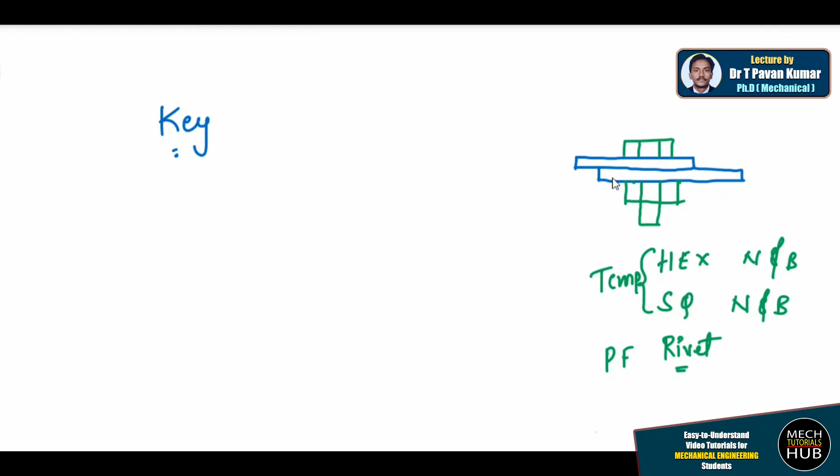Now the question is, in case of flat rectangular sheets or square sheets, you are going with this kind of arrangement, that is fine. But how about a shaft? When you have a cylindrical shaft of this kind, I would like to join these two. This is shaft number 1, and let us call this shaft number 2. These are two shafts which are having some dimensions.

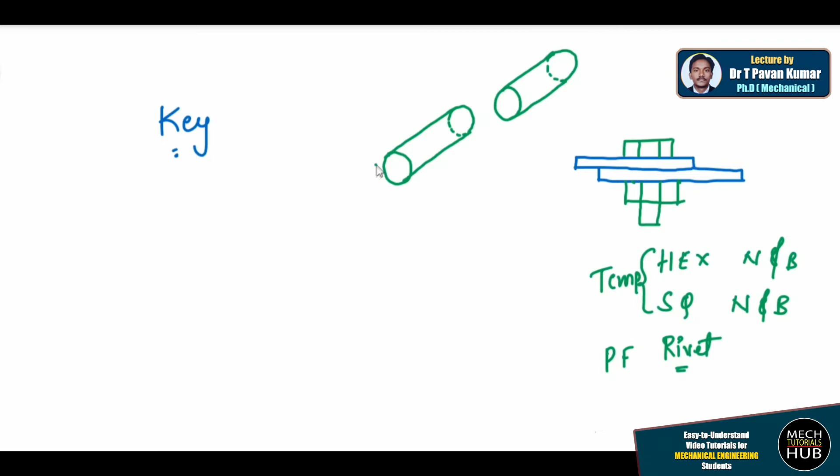Let us say this is maintaining a diameter of d1, this is also maintaining a diameter of d1, and having a length of 100 meters. This is also having a length of 100 meters. I would like to join these two. Why would you like to join is a question.

Now for example, if you know about a turbine, which is a prime mover, I am giving you the application point of it. So one end of the shaft is connected to a turbine and the other end is connected to a generator. So in between these two shafts, if I would like to make any coupling, if I would like to join these two shafts together, for example this is shaft number 1 and this is shaft number 2, if I want to join these two, what I try to do is mount a hub over it.

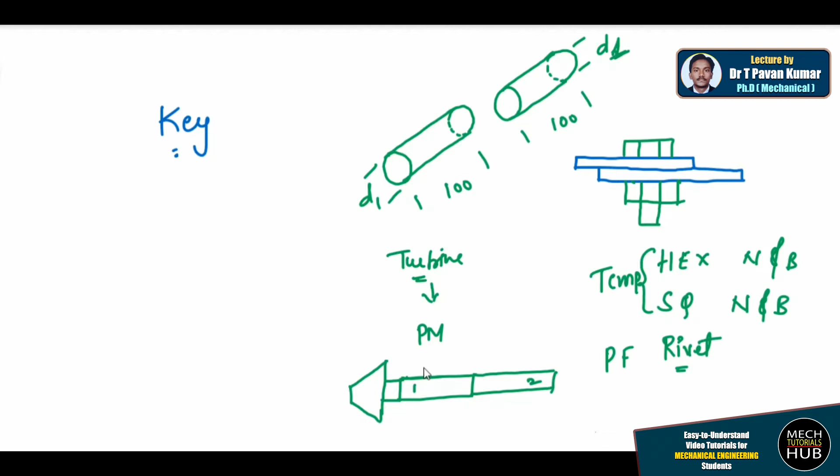From this side I'll try to mount a hub. For example, the hub's internal diameter should again match whatever the diameter of the shaft is, and the external diameter should be 2 times the internal diameter, and there should be a length maintained. What length should be maintained, we'll discuss all this.

This is the internal position of the hole. When I place this, I just call this a hub. When I place the hub over from one side to the other, the 2D representation of the hub is going to be something like this. Now I just try to place it from one side to the other, then I need to lock the hub and the shaft. That is the main idea.

Why would you lock it means here, this is going to rotate. When you apply some torque to it, it will rotate with some speed, maybe 2000 rpm, rotations per minute. When this particular shaft rotates with 2000 rpm, there might be some misalignments. It is not compulsory that the shaft and the hub should rotate with the same speed. There might be some mismatch between the speeds unless you fix these two.

Now to fix these two shafts, it is not possible with the help of a hexagonal nut bolt, square nut bolt, or a rivet, or welding. It is not at all possible with welding also, because it is going to exhibit a speed of 2000 rpm or 4000 rpm, which is very high speed comparatively.

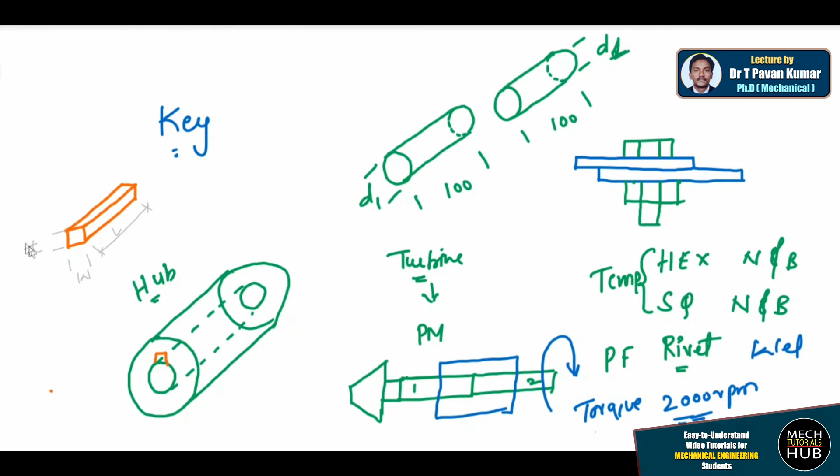So conventionally consider this as a key. Now I make use of this key. What I try here is, I just try to drill a hole in the hub area - I drill a slot in the hub area. Now the size of this particular slot should maintain a size of W by T.

Because this is the key I am going to manufacture for my application point, based on the width and thickness of the key, I'll try to drill a hole over here, and it should maintain a length. Let us say that particular length.

Now when I place this hub from one side to the other, in the front view, that particular keyway may look something like this - hidden, because it is completely invisible from the front view. I was just showing you with a hidden line. This is how it looks.

Now likewise, throughout the circumference, I'll try to place 2 or 3 keyways. This slot we call a keyway. We call this slot a keyway.

Try to understand - now how many elements do we have? Shaft number 1 is one element, shaft number 2 is another element, and a hub is called the third element. Other than the third element, there is a keyway. Now in this keyway, we are going to place a key - that key we call the fourth element.

The idea here is not to weld, not to rivet, not to use a square nut bolt, not to use a hexagonal nut bolt, but only with the help of a key arrangement can you lock the hub and the shaft. Now these two shafts are under a butt arrangement, number 1 point.

Number 2, the hub is placed over it symmetrically from the midpoint, from the butt joint on either side - it is equally distributed, the hub portion is equally placed. After that I am placing a keyway inside. When you place a key in between the shaft and the hub, this key is going to lock both the elements. Try to understand - this key is going to lock both the elements.

Now if I show you the front view of this particular arrangement, let us consider a front view. This blue color one is a hub. I'll just try to draw this hub with a blue color. This is the hub from the front.

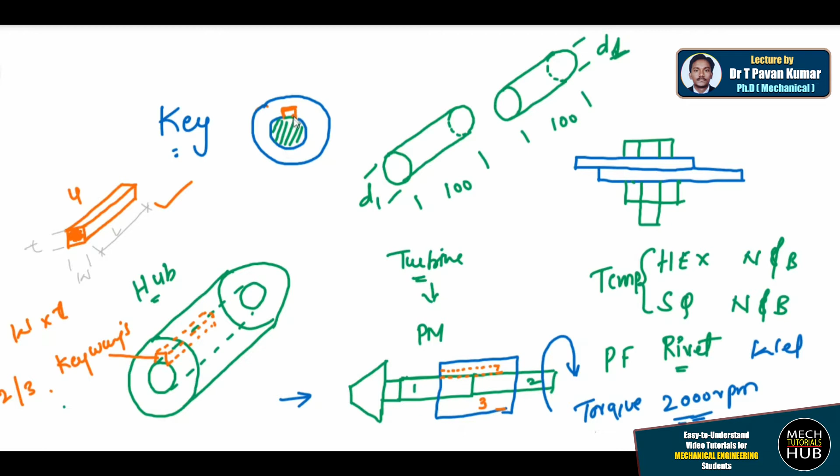Now I am going to take this particular key and insert it from here. When I insert from here, it will go in with some tightness - I just knock it with the help of a hammer or some other arrangement. From the side, this is how the arrangement is going to be. This key is going to catch hold of the hub and the shaft. This is how a key will work.

Like in general, you lock your room with the help of a lock and key arrangement. In a similar fashion, to lock this hub and shaft, we'll try to use a keyway. Now these keyways are different types, and these key shapes are also different types - that discussion we'll have. I think I'm very clear now. Try to understand - the only idea to use a key is to clamp both the shaft and the hub.

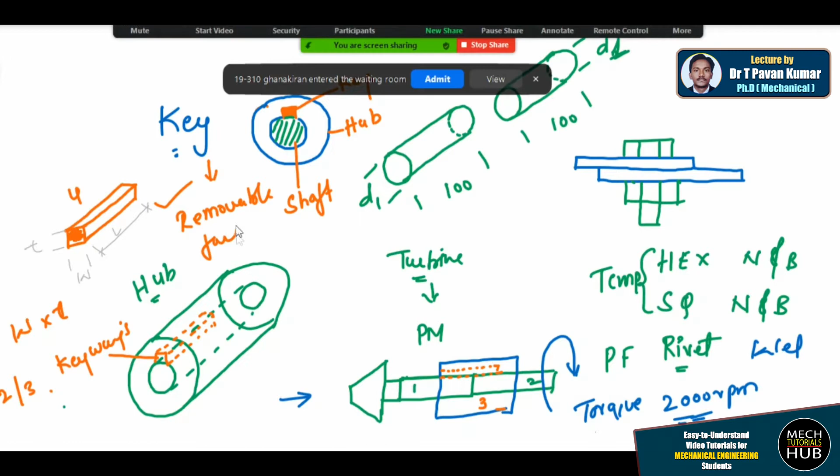Now this key acts as a removable fastener. You can call this key a removable fastener. Now this is also a fastener, but you can remove it whenever you want.

That is possible, whereas in case of a riveted joint, this is not at all possible. If you try to remove it, what happens? The complete sheet will get spoiled - that is what we have discussed now. So this is a permanent joint. Now key is also a temporary joint.

When and where required, you can remove it. Assembly and removal of these joints are easy as they are simple in shape. Now the shape of the key is very simple - only thing is, there are a few changes you find from one key to the other.

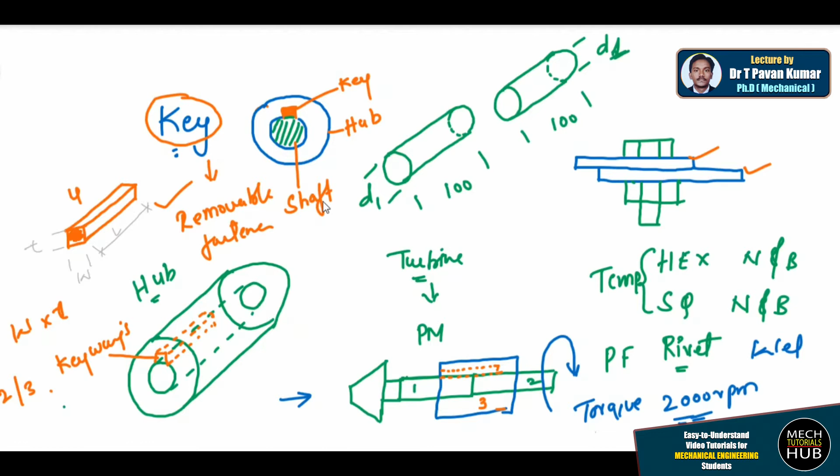Remember this is also a temporary fastener - whenever you want, you can remove it. Based on different types of keys, those keys are used under different loading conditions. That discussion we'll have now. If you have any queries till now, you can ask me.

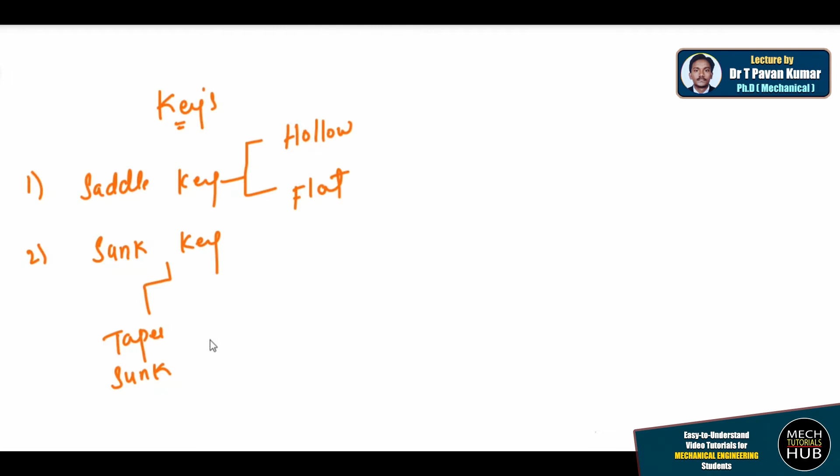Other than this, you have parallel or feather keys, which also comes under sunk keys only. Okay, parallel keys or feather keys. We'll try to finish off this discussion today.

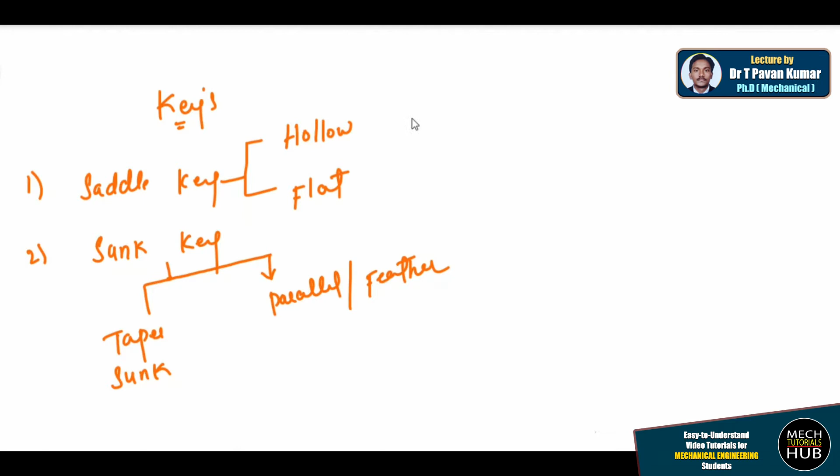Now coming to this particular saddle key, let me give you a briefing of what exactly saddle keys are. This saddle, which I have drawn a simple sketch before, let us call this a simple representation, a 3D representation of a key for your understanding.

Out of this, let me call this the width, and this is thickness. The overall is the length. Try to understand, the overall is the length.

Now coming to the saddle keys, there will be a taper section on the top surface, with uniform width throughout. If you try to calculate the width at any cross section at any point of the length, then the width will be same.

But when it comes to the thickness, the thickness will come down from one side to the other. For example, here the thickness maintained is 10 mm. Thickness of the key maintained is 10 mm.

If you go throughout the length, at the end there might be a thickness of 9 mm, or else there might be a thickness of 8.5 mm. This means there is a taper section of 1:100.

What is the meaning of taper section 1:100? Try to understand, at every 10 mm length, there is a reduction of 1 mm. That is the meaning of 1:100.

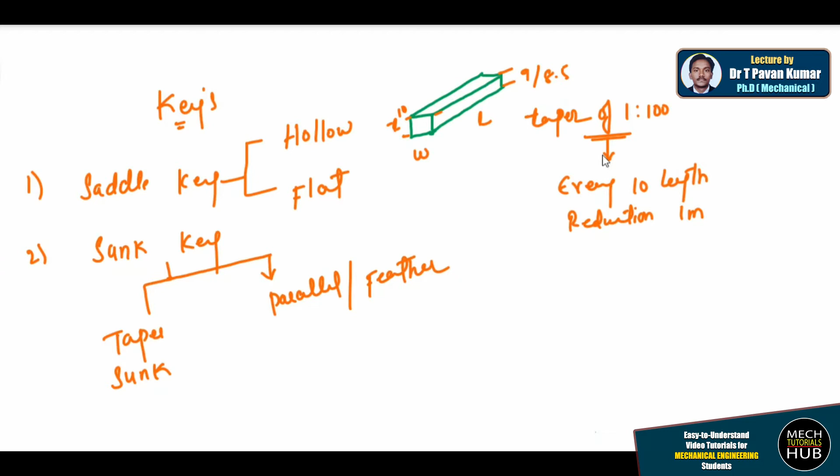For a length of 100 mm, we are going to reduce by 10 mm. That is the logic. That is nothing but a taper section.

For example, if the length of the key is 100 mm, then the taper section is going to be 10 mm. Whatever thickness you are using, the thickness is going to drop down over a length of 10 mm. If it is maintaining 50 mm, when you come to the end of the key, it is going to maintain a thickness of 40 mm. That is the meaning.

If here it is maintaining 30 mm, at the end you could see it as 20 mm. If the overall length is 100, only then this is applicable. From the taper section of 1:100, the symbol of taper section will always be something like this.

Initially there is an actual thickness maintained, but as you go throughout the length, it is going to drop down. This is the meaning of 1:100 - throughout a length of 100 mm, there should be a reduction of 1 mm for every 10 mm.

That is the meaning of this particular 1:100 ratio. But when it comes to our actual sketches, what you draw on sheet, we don't maintain any 100 mm actually. The length will be hardly 25 mm or 30 mm you will get. Okay, those standards I'll show you. So in such a scenario, what exactly do we need to do?

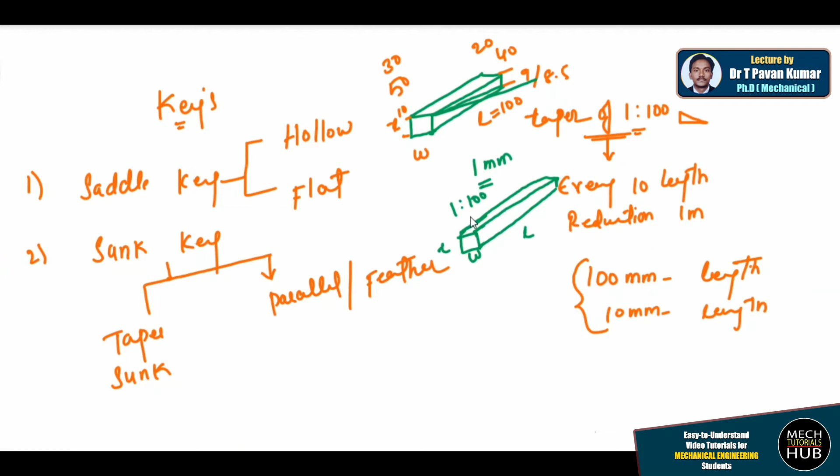Okay, and these saddle keys are again made of two types: one is hollow, one is flat. What is hollow, what is flat, we'll see now.

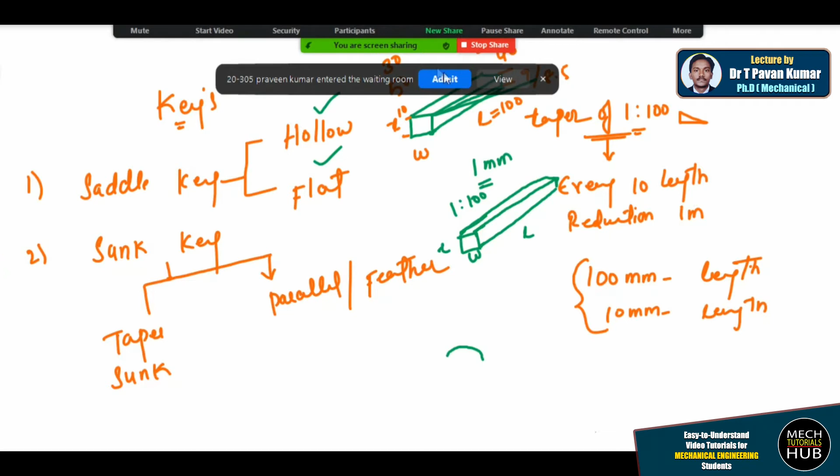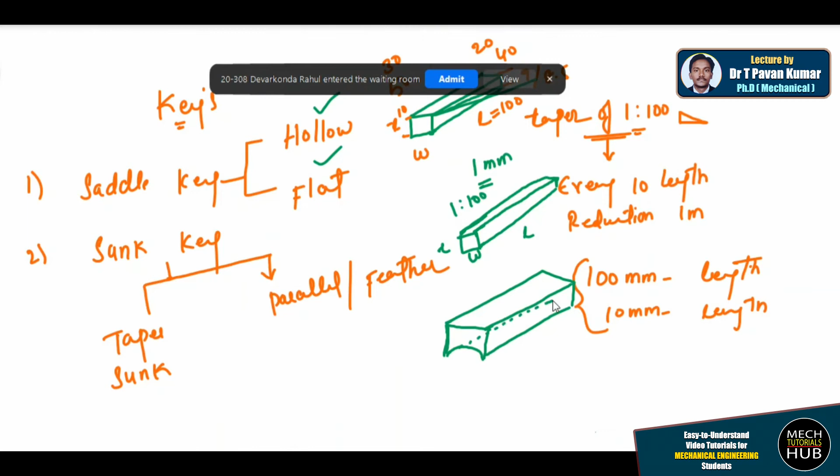Hollow, nothing but the hollow key is represented something like this. The bottom flat surface is going to be in concave shape. This bottom is going to be concave, and the height, thickness will remain same. The length, whatever we have calculated, we need to follow. Throughout the length you have a concave shape arrangement, something like this in three-dimensional representation, throughout the length you have a concave shape profile.

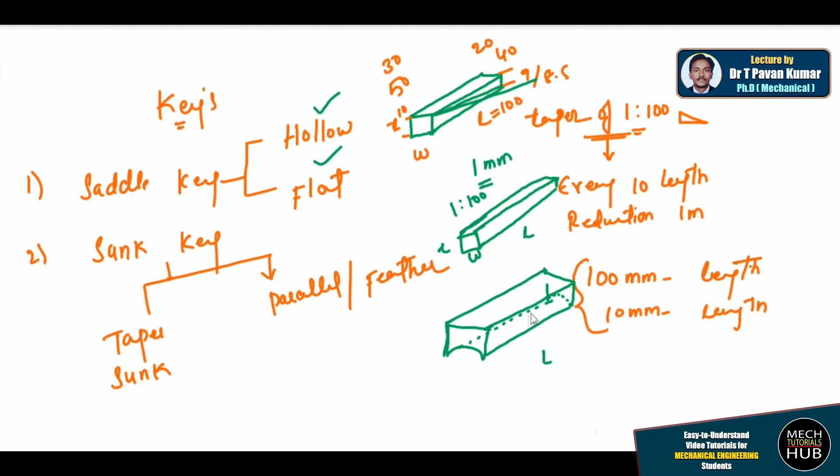Now how this particular arrangement is going to be, that discussion we have. A hollow saddle key has a concave shape bottom to suit the curved surface of the shaft. This concave shape is going to sit on the shaft properly. The concave shape depends on the diameter of the shaft which you are supposed to use.

So how this arrangement is going to be, let us have a small discussion on it. Coming to the hollow, let us consider this as the hub portion, and this as the internal diameter of hub portion. If this is the case, we need to have a keyway. Let me erase this portion and draw the keyway. Let us consider this as the keyway. Till here it is fine.

Now I am taking this particular key and inserting it from the front. Then what happens? What I could see is only this profile, this shape. So that shape is going to sit here inside this, and the profile, the concave shape, will take the shape of the shaft, something like this. Means three-dimensional, I'll try to show you the representation.

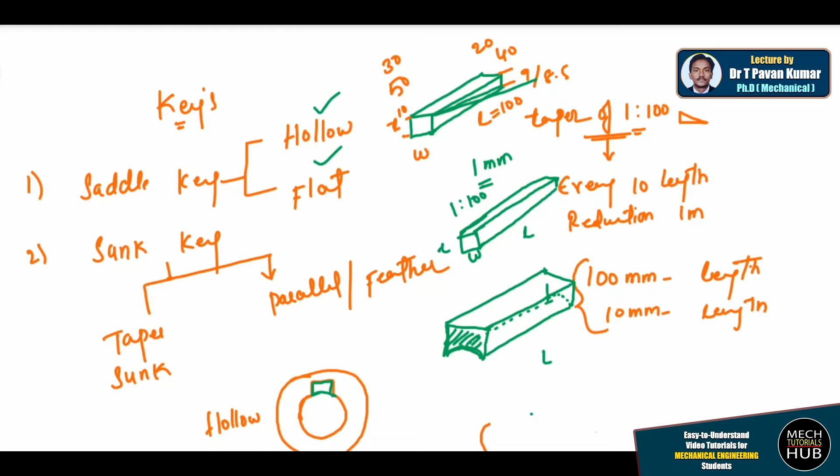We'll see the 3D representation. This is the internal diameter of the circle. This is the external diameter of the hub portion.

Then let us consider this as the length of the hub portion, something like this, and there will be a through hole from one side to the other. So let me take this through hole as an invisible hole, and there is a through hole indication. This is fine, but here you find you have a keyway.

So that keyway I am going to represent now. This key is going to take the shape of the shaft followed by the height, something like this. It is going to be fixed something like this.

So everything will be hidden. So I'll just try to make it hidden. I just try to make things hidden.

Sir, you can use a different color. Very clear, okay ma. Is this clear now? Green color, because I have drawn or represented this key as green color, no? That is the reason I am taking green color here. This is how it is going to fix, ma. The main idea here is, better what I try is, I'll take some other color, as you said, for the shaft portion, something like this.

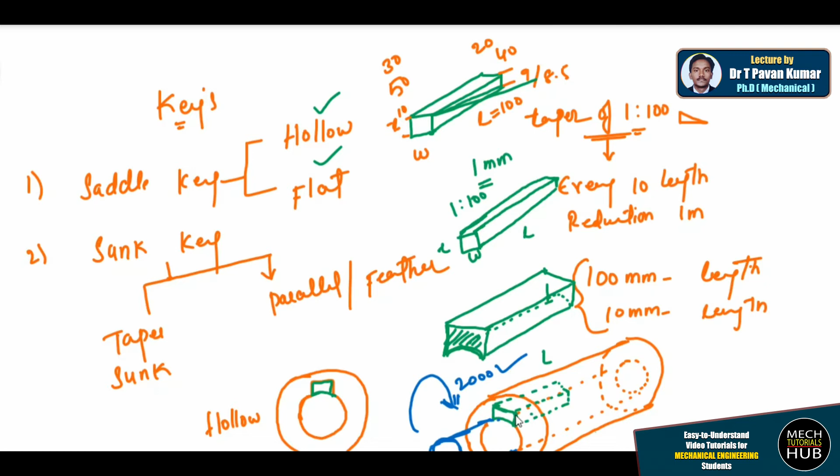Let us say this particular shaft is continued till the other side. Then you will get an idea of how the arrangement is going to be. Now the idea is to lock these two arrangements. This is how it is going to be.

This is in case of a hollow key. But whereas in case of a flat key, the complete key is flat. There won't be any concave shape to the bottom, only a flat surface. A complete flat key, something like this, will have a flat surface, a width, a thickness, followed by a length.

Coming to the top surface, here it is completely tapered. There will be a taper section. For example, if the thickness of the key is 10 mm, then as it moves throughout the length from one side to the other, the thickness is supposed to be 9 mm. We need to reduce by 1 mm for every 100 mm. But that logic can't apply here because the overall length is not very high — around 25-30 mm when it comes to specifications. There are some standard specifications also.

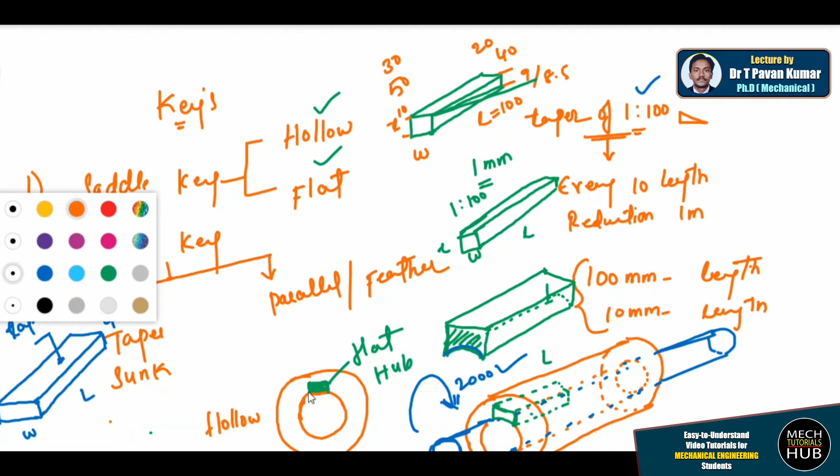This is about a hollow key, where the hollow key will completely insert inside the hub portion — the key takes the portion of the hub, but not the shaft portion. Whereas in case of a hollow key, you see the same kind of arrangement, where the complete hollow key takes a portion of the hub, 100%. Whereas in case of a flat key, only some 1 mm or 0.5, 0.2 mm portion of the shaft is taken by the flat key, because we are making it a straight surface.

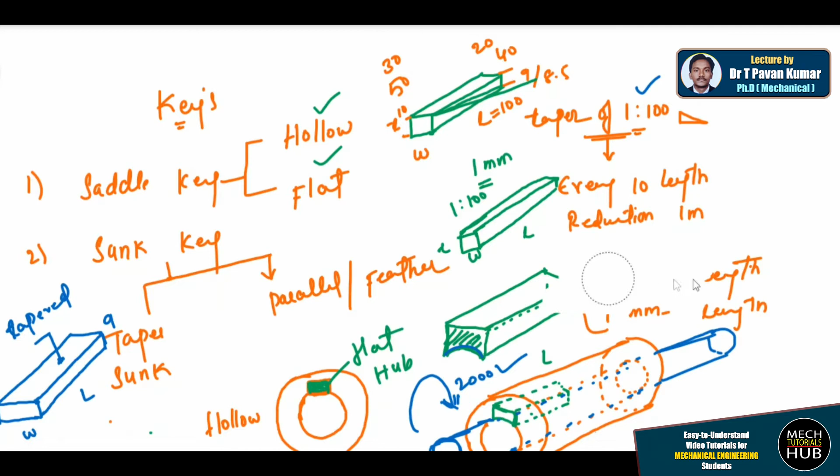Same thing I would like to present here. Wait a minute, let me erase some points. Again I'll just try to represent it three-dimensionally. Let us consider this as the shaft, and this is the length of the shaft — complete length of the shaft.

Let me join something like this. Till here it is okay. Now I would like to place a keyway directly just to make you understand. Based on the length of the key, I'll try to file this portion, the area where exactly the key is going to be positioned. So this area I'll just try to make it flat, not circumferential, just flat.

Then what I do is I'll go with the hub portion. Let us consider this as the hub portion, external one, this is the internal one, and there is a keyway. This is the length of the hub, and the keyway is still some distance away. What distance, we'll see that. There will be a hub portion, this is how it is going to be.

Now this is how the arrangement of a hollow key or a flat key is going to be in case of a simple shaft and hub arrangement, where these keyways are used in case of low duty applications, not very high duty applications. For example, in case of pulley arrangements, gear arrangements, or wheel arrangements, couplings, this particular keyway is used. That is how the arrangement is going to be.

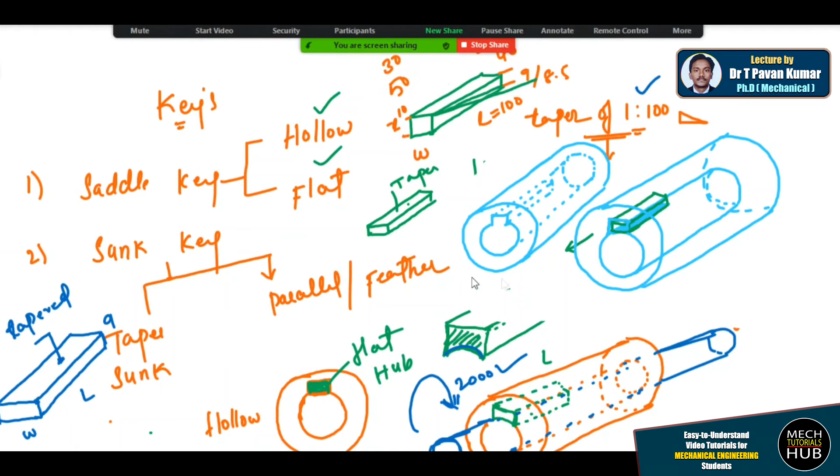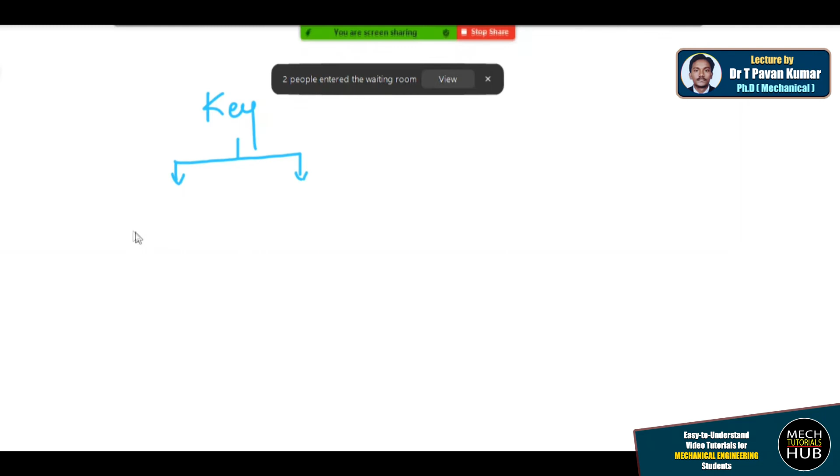Let me draw the representation. What exactly you people need to do in case of an examination, let us see. Coming to your examination point, you need to draw the representation, whether it is a hollow or a flat key. No need to draw any 3D views of the component or the key.

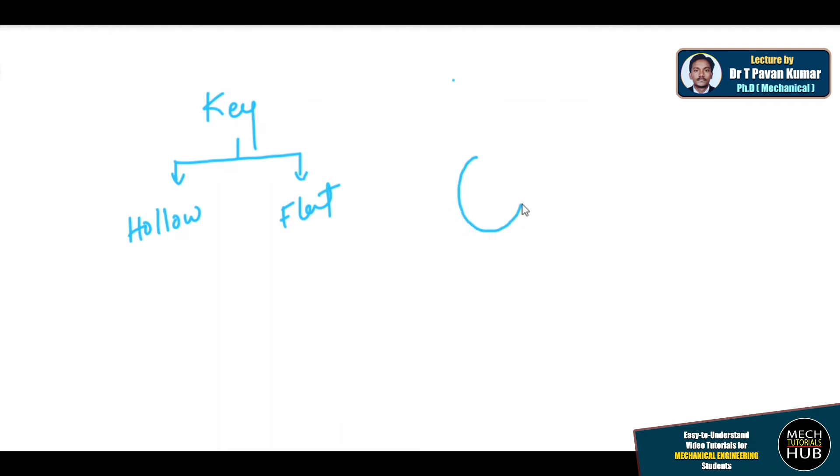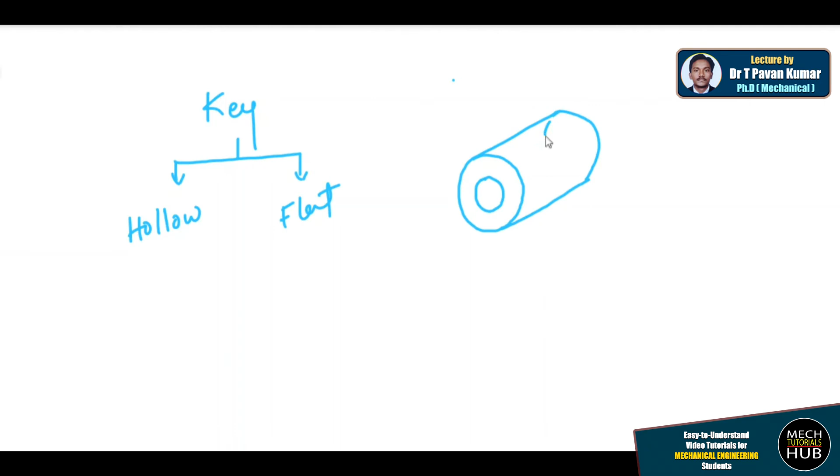All right, let us consider this as the hub portion, where the shaft is going to insert. This is the hub, this is how I could show you. And if it is where we need to insert a key also, so that will simply take this position. Okay, here is the keyway.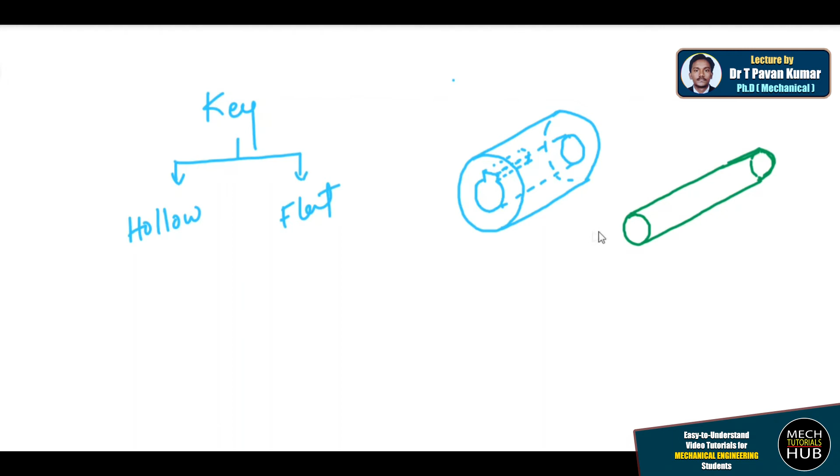It will maintain a certain distance; those distance details will go. And there is a shaft, I'll change the color of the shaft. There is a shaft having a diameter equal to whatever diameter is maintained by the hub, and an overall length of some 100 mm or 50 mm. We are not bothered about the specifications now. My idea is I would like to insert a shaft inside the hub; this we call it as a hub.

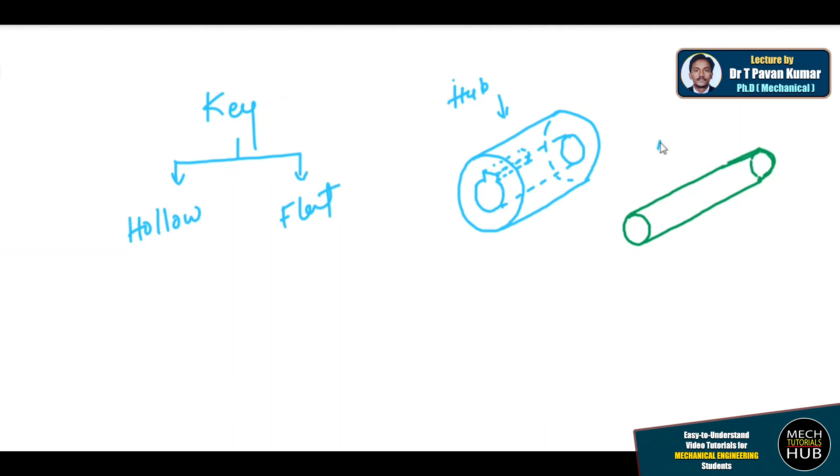This is a hub and this is a shaft, a circular or cylindrical element. Now both are maintaining a diameter of d1. This shaft is also maintaining a diameter of d1. The outer diameter here you call d2. Till here it is fine.

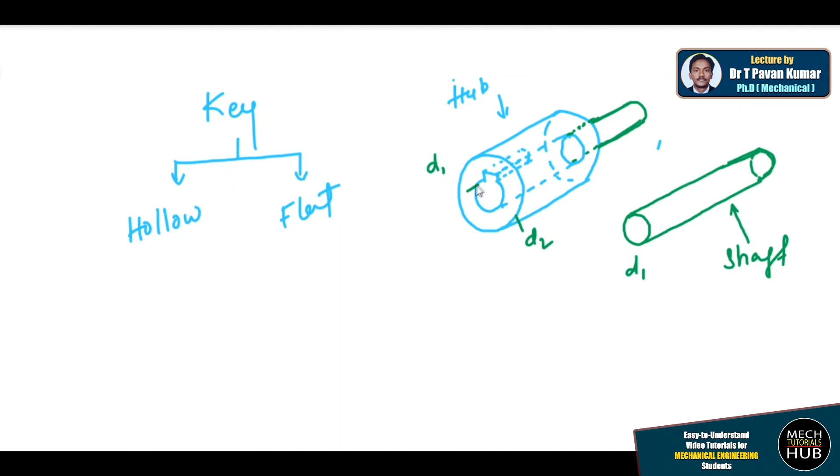Now my idea is to arrange this shaft inside this. When I insert it, what happens? Some portion will completely go inside and the rest will come out, something like this. The portion coming out is completely visible to us, and the portion on the front side is also visible.

This is how the arrangement is going to be. Now these two should lock, so I'll take some other color for your understanding. Let us consider this as the key, which is maintaining W and T. What is W, what is T, we'll discuss now. As of now I'm representing everything conventionally. This is element number 1, this is element number 2, this is element number 3.

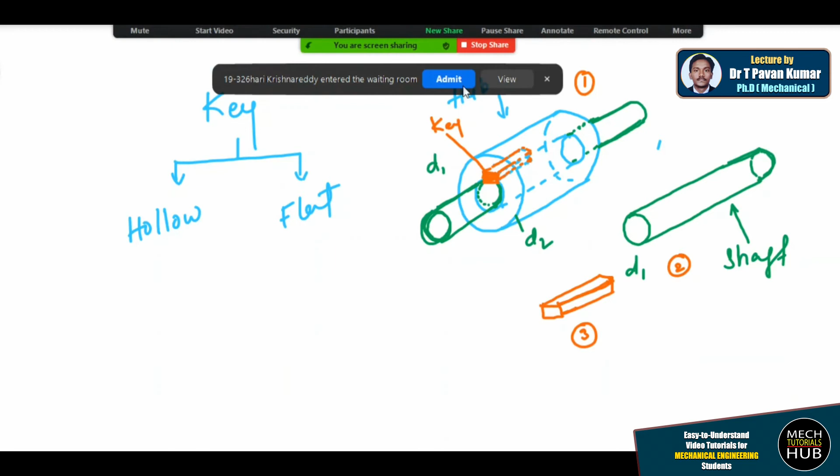I'm making use of all three just to prevent relative movement between component 1 and 2. So for that I'll take this key and place it here, whether it could be a flat key or a round hollow key. This is going to insert up to some length, something like this, so that this key will help to lock the hub and the shaft.

If it is a hollow key, you have a concave shape at the bottom, something like this. If it is flat, you have a bottom flat surface. But in both cases you have a taper section. Try to remember, in both cases the top surface is tapered. Unless it is tapered, you can't insert it inside.

For example, if you want to insert a nail inside the wall, what you try to do initially nowadays is drill a hole. After that you place a wooden piece inside it. That wooden piece is going to be of this shape, if you could remember, wooden pieces of this kind, because the dimensions W and T maintained here in the front will not be maintained in the back, since it is somewhat tapered in cross section.

Try to understand, width will remain the same but thickness will vary. That is what it means. This is how this will work. Coming to the application point, these keys are used in case of pulleys, gears, wheels, and coupling arrangements. This is about a hollow key and a flat key. We'll go into details of the standards within a minute or two.

That detail we'll see. Now after this, saddle key - these two are nothing but saddle keys. This is also saddle. This is how the arrangement is going to be, but the logic remains the same, the arrangement almost remains the same, but the key shape and size will vary. That is the only difference.

Now in the examination also they ask you to draw the representation of saddle keys conventionally. So here you need to consider your own dimensions - diameter of the shaft, internal and external diameter of the hub, and width by thickness by length of the key also conventionally. And show the taper section there too, that is also important.

But in your examination, there's no need to draw this 3D representation. Only thing is, if this is the arrangement, you need to show the arrangement, that's it. For example, if I view this particular component from the front and from the side, how exactly it is going to look, that representation we need to show. I'll show you one and move on to the next topic.

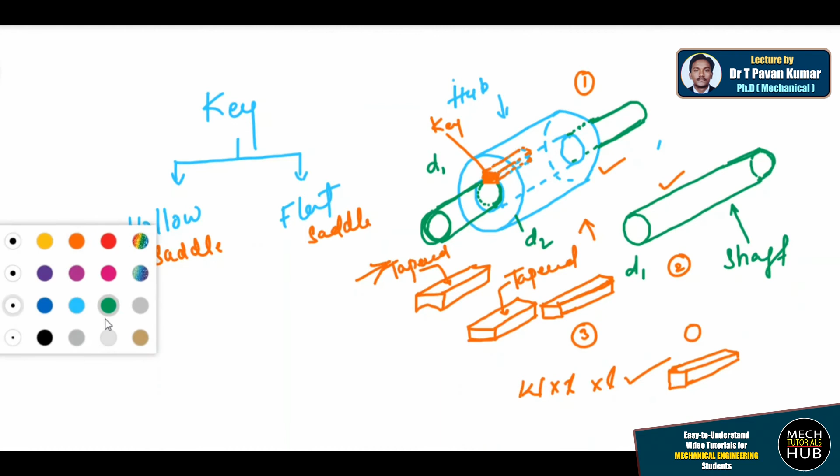Let me draw this, taking the same color so you'll understand. This is the outer circle or outer diameter of the hub. This is the internal diameter of the hub. Now let us imagine that the shaft is already inserted. This is the portion where the shaft got inserted, meaning we are showing the cut section so the other person will understand. And to show the keyway, it will remain like a box only, something like this.

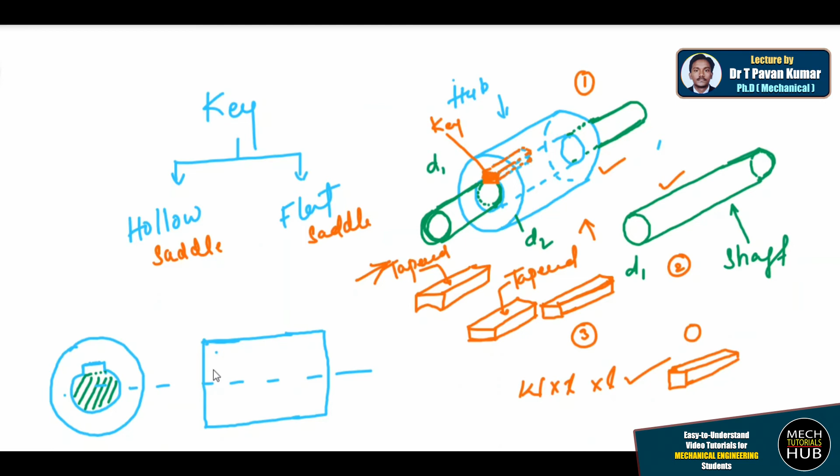And side view, we need to represent the side view also. From the side, if you look at the component, it will maintain some length - the hub is maintaining some length, followed by, here it is closing somewhere, here it is closing. This is the axis line. Then there will be a shaft portion. Here, I just try to place this shaft somewhere here. There is a shaft inserted which is coming out. If it is coming out, it is visible completely.

Okay, this side also I'll try to make things visible for your understanding. This is fine, but to lock these two, we'll try with a keyway. I'll go with a color. Now this is the keyway in between two components. This is how it is going to be. This is the front view of the arrangement, this is the side view of the arrangement. And here is your key.

If it is a hollow key, you have a circumference, something curvily concave shape. If it is a flat key, you have a straight surface. That is the only difference, simple difference. This is how it is going to be.

Now let us discuss about sunk keys. Let me close this.

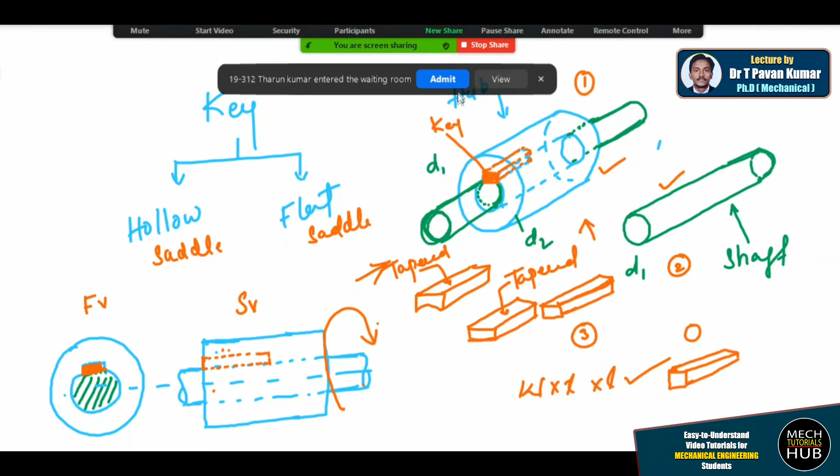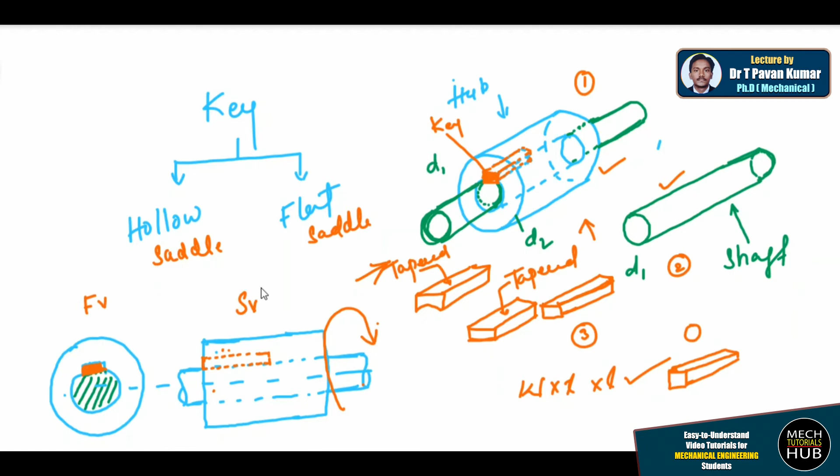Okay, I got it. Coupling, do you know the arrangement of a coupling? I'll just draw that sketch so that you'll understand.

For example, the coupling is going to be something like this. Let us say this has one coupling where there is a hole from one side to the other, one flange, you can say. This is the other flange. Okay, this is flange 1, this is flange number 2.

There I have explained the concept of a key, just a concept of a key, but as you having doubt, let me take this as shaft number 1. This is shaft number 1, this is shaft number 2, 1 and 2.

Now the idea is, when I rotate, I would like to transmit power or the torque from one shaft to the other, the torque or the power, speed or the power. Then what I do, I'll insert this particular shaft from one side.

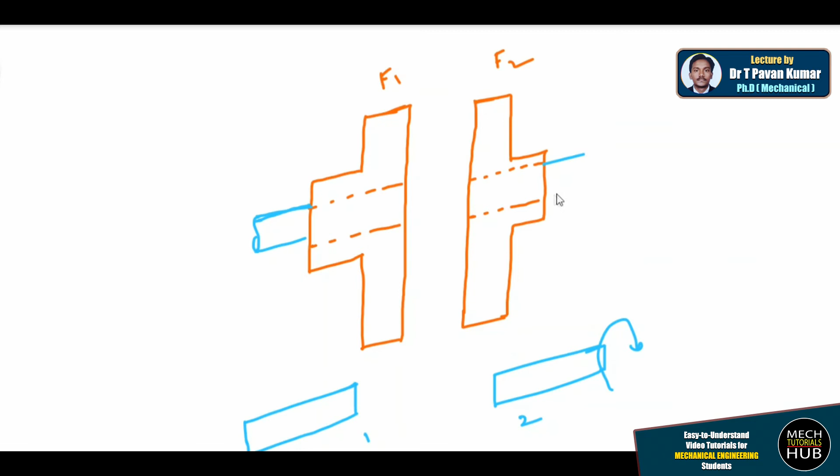This is a shaft, and this shaft from another side. Okay, then both will come and join somewhere here in the name of butt. I'll just join them both, something like this.

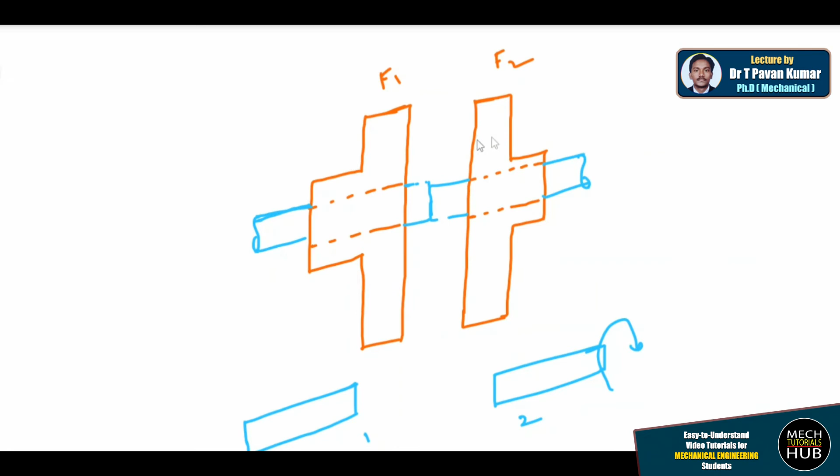Now what I do, I'll try to bring these two couplings closer so that you'll understand. The idea is not just to clamp, the idea is to transmit torque or the power also.

Okay, let us consider this as one more flange of the coupling. This is the shaft portion. Let me change the color. This is the shaft portion, this is the inserted one. Okay, both got butted somewhere here.

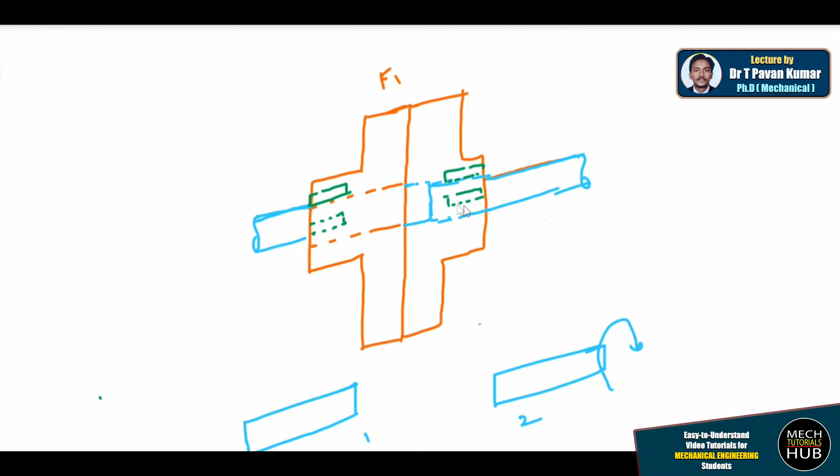Now to lock these two, what I can do is use a keyway. I can simply make use of a keyway somewhere here. Try to understand, here is one and here is another. At some 90 degrees you find one more key, or else 60 degrees one more, something like that. Throughout the circumference you will try to place 2 or 3 keys.

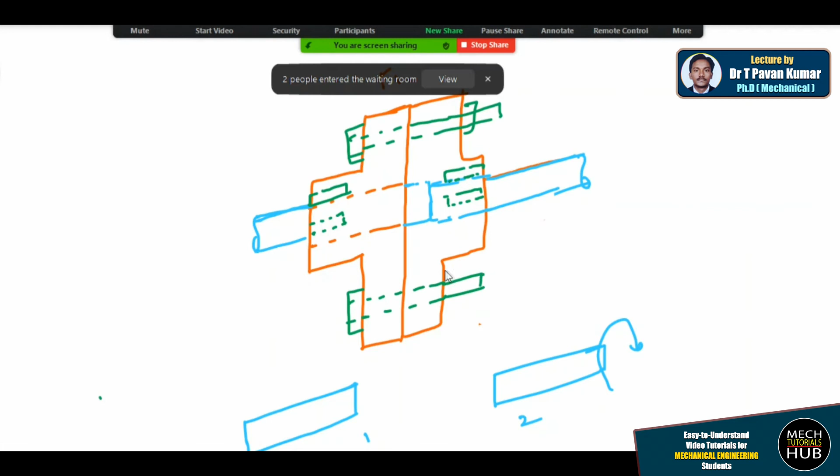Now this key will help the shaft to be in alignment and clamp with the coupling. And to clamp these two couplings, what I do is go with a hexagonal nut and bolt arrangement, something like this. This is the application point. This is how it is going to be, and this is the bolt portion, this is the nut portion. Wait a minute, somebody is entering.

The idea is, I would like to transmit the torque from one shaft to the other. That I can't do with the help of welding or riveting or nut bolt arrangement alone. So what I'm trying to do, as these two shafts are circular in cross section, and I'm using a coupling arrangement which is made of 2 flanges, or you can say hubs. There are 2 hubs or one single hub. What I'm trying to do is place one shaft from one side and one second shaft from the other side, placing it in butt position, to arrest the relative motion between hub and the shaft, making use of a key. Is this clear now?

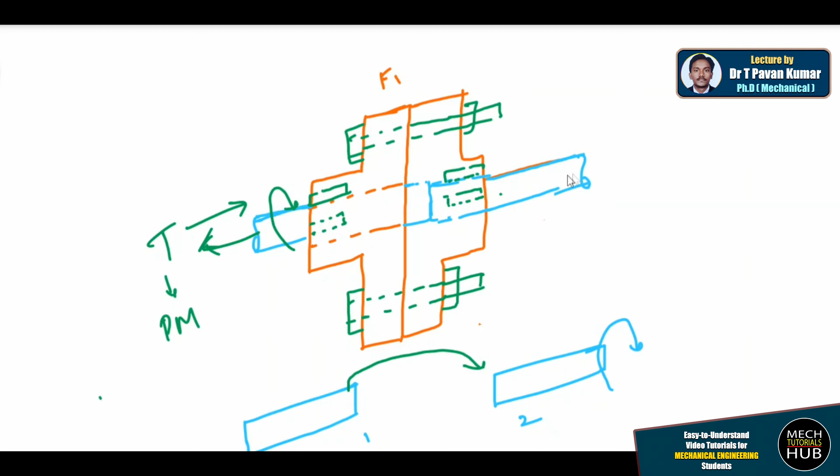This end may be connected to a turbine, where the turbine acts as a prime mover. It will give some torque to the shaft, and the shaft starts rotating with the same speed. The other shaft, which is connected to a generator, should also rotate with the same rpm. Maybe this is rotating at 2000, this should also rotate at 2000 rpm.

Simply, if I make use of a hub over it, it won't be so effective. To lock these two shafts, I am using a hub and a key. To connect these two shafts, or to transmit power or torque from one shaft to the other, my idea is to make use of a hub and a key. As we are dealing with circular components, not flat components, try to understand this.

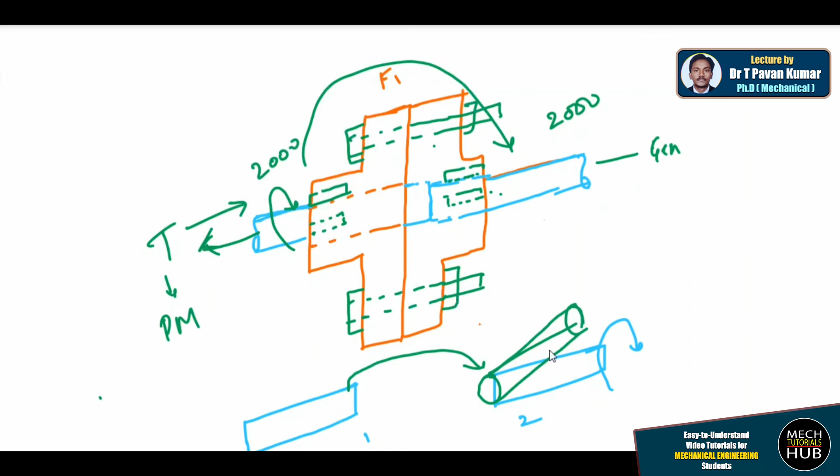This is how it is going to be. That is the main idea. Alright, so now let us talk about...

Sunk keys - the idea is the same, but in some cases hollow key will not work, flat key will not work, because it can only take a very small amount of loading conditions. You can't go up to very high levels of RPM in such a scenario. Now, what should be the dimensions of a key - length, thickness and width - these decisions we will make when we deal with the subject called design of machine members.

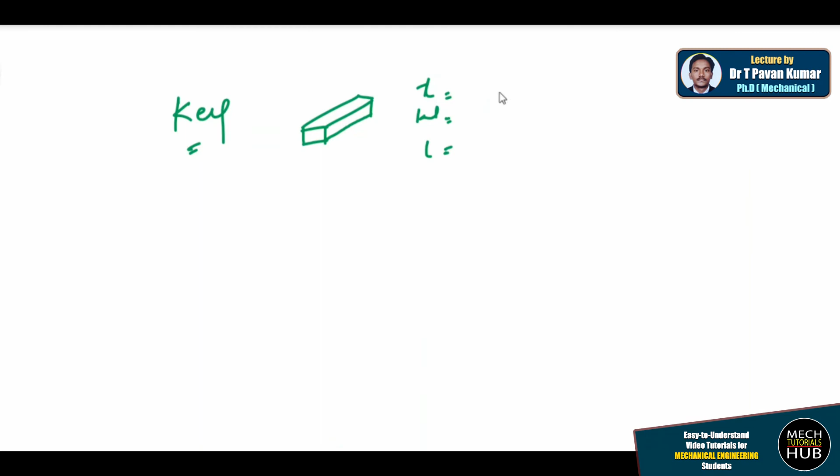By using permutations and combinations, we'll try to go with it. For example, if this is the key, what should be the length, width and thickness? T, W and L are decided based on the calculations. What calculations will we do? We'll do some strength calculations, and based on these strength calculations, we fix the dimensions, one proportion to the other.

If the thickness is 10 mm, W should be this much, length should be this much. All these proportions you find in the soft copy which I have sent you - there are different proportions given. If the thickness is 12 mm, then what should be W? That is already fixed. What should be the length? That is also fixed. These are all the simple calculations for this, which I'll also discuss now in case of sunk keys.

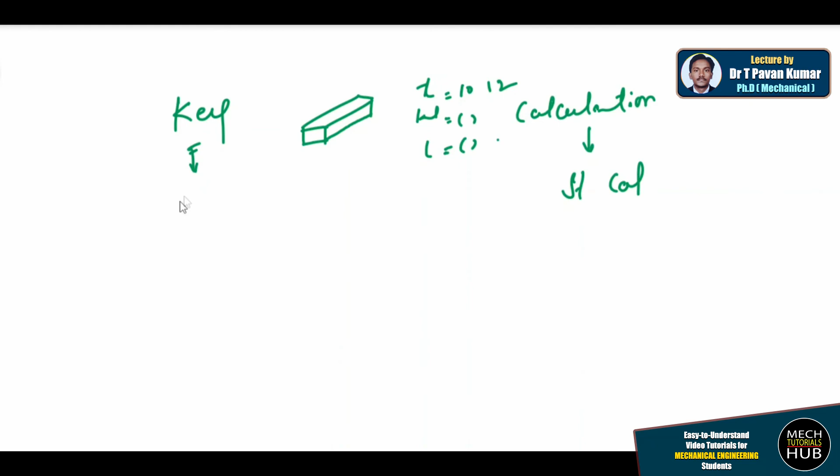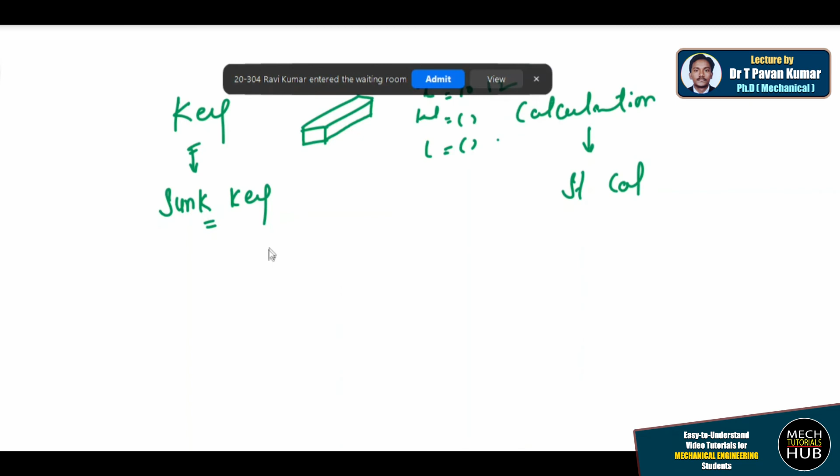Coming to this sunk key, it is also one type of key used to prevent relative motion between two elements - the hub and the shaft. Now coming to this particular sunk key, the only difference you see here is that taper is common. You have taper sunk key, and different types of feather keys. These sunk keys are classified...

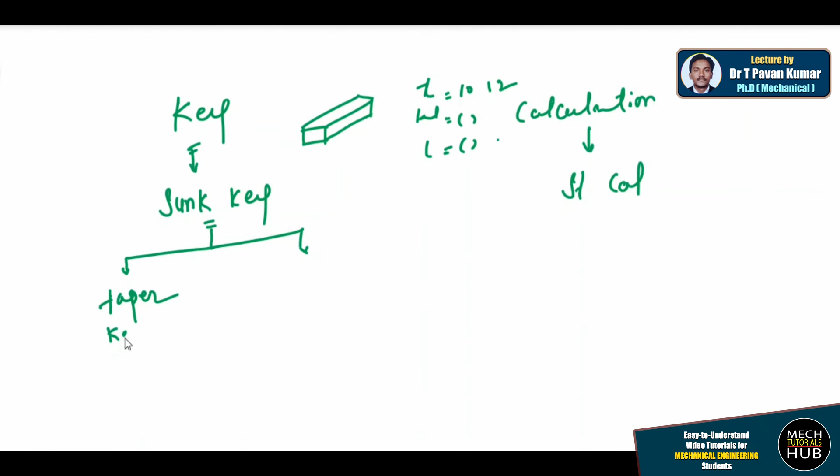Into types. Number 1 is taper key. Number 2, parallel keys. Number 3, Woodruff key. This is broadly classified into 3 types. Now these sunk keys are used in heavy duty applications.

Heavy duty application - it all depends on the conditions where exactly you are going to use the type of key. Comparatively, if you compare with hollow or flat key, sunk keys are stronger and can withstand higher loads. That is why I said these are used in heavy duty, as a fit between the shaft and the hub. So again the same concept or logic will apply, but only the shapes will change. The shape of the key is completely different. I'll just try to draw the shape of the key.

Just try to understand - the shape will be: some length will remain, and there will be a height. There will be a height and a thickness. We call this the thickness, and this is the height, and there is a drop down here, something like this, followed by a width. This is vertical, slant, horizontal - then this is a 3D representation of a key.

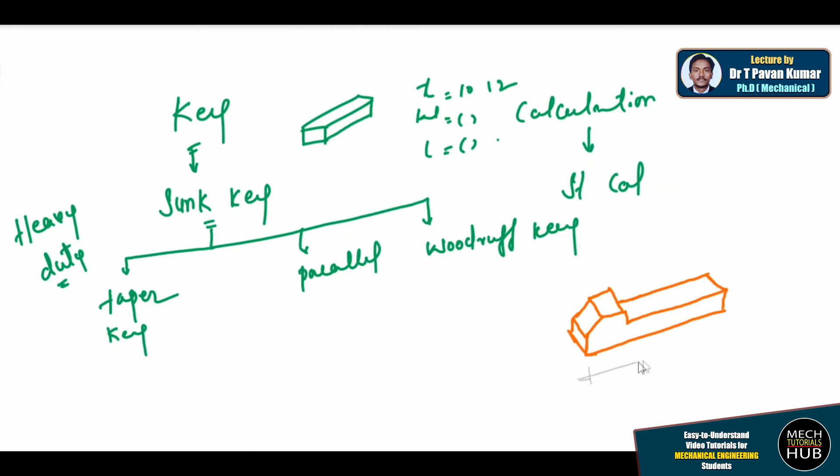Now out of this 3D representation, this is called the length of the key, and from top to bottom we call this the height of the key, and this small one as the thickness of the key. You have one more called B - this is represented with B. From here to this line, this is represented with a capital B. Capital B here is nothing but the width of head. This is called width of head, capital B. Coming to H, it is nothing but the height of head.

This is the height of head, and standard taper will maintain. Standard taper is nothing but the taper shape, which is 1:100. This is also fine. Other than this, this is called the width of the key.

Now the name of this particular key is nothing but key with gib head. What you call is, this is also a key with gib head.

Now this is called the head, gib head, which will exactly lock both the shaft and the hub portion. This particular head will help to prevent the rotary motion between the shaft and the hub. This actually we'll understand better when you visit any institute or organization where they use this particular kind of arrangement. In general discussion you might get many doubts in mind.

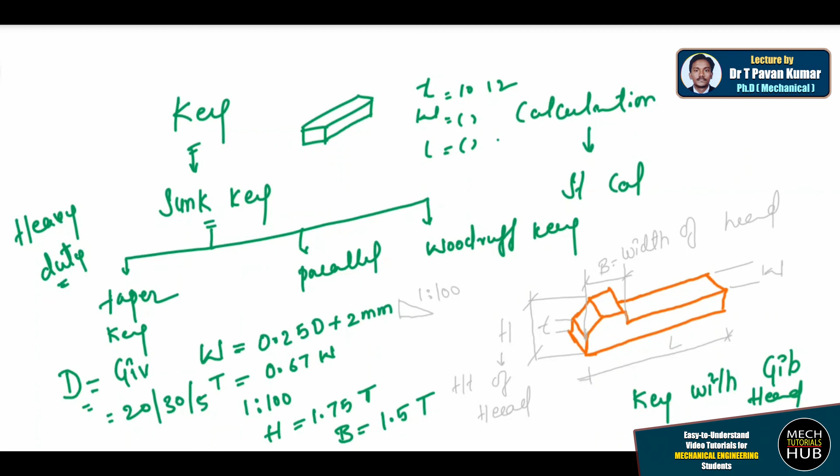In case of key with gib head, you need to remember all these dimensions. But one more important point to be noted here is, I'll draw the representation of taper sunk key.

Now, as we have seen in case of hollow and flat key, the arrangement is simple. But in case of these two, the arrangement or representation is something like this. You have the hub, the outer portion or outer circumference of the hub, and the internal part, as the hub is hollow, so we'll try to draw it.

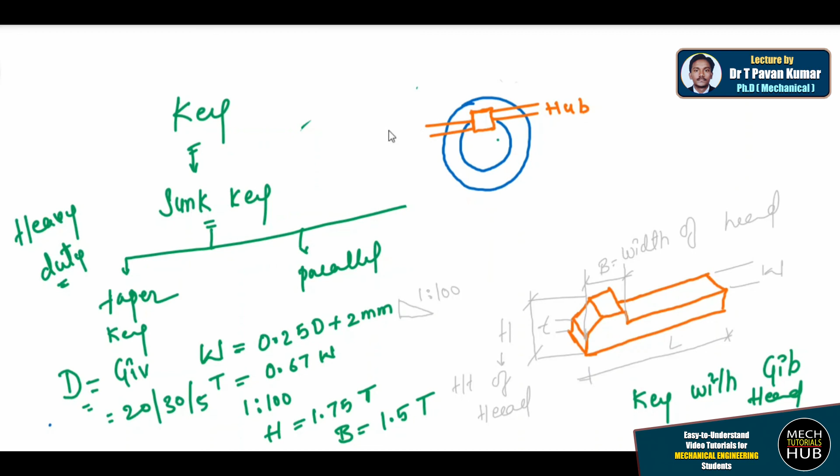Now here, when you place a keyway or a key, the key will be inserted something like this. This is how the key will be inserted. Half portion will go into the hub, and half portion will go into the shaft. Try to understand. Now initially when dealing with hollow and flat key, keys are completely inserted into the hub portion.

But in case of this arrangement, there is a groove in the shaft also. Meaning the shaft is designed or developed in this way. This is the development you could see. There is a groove provided in the shaft also. Try to understand this drawing.

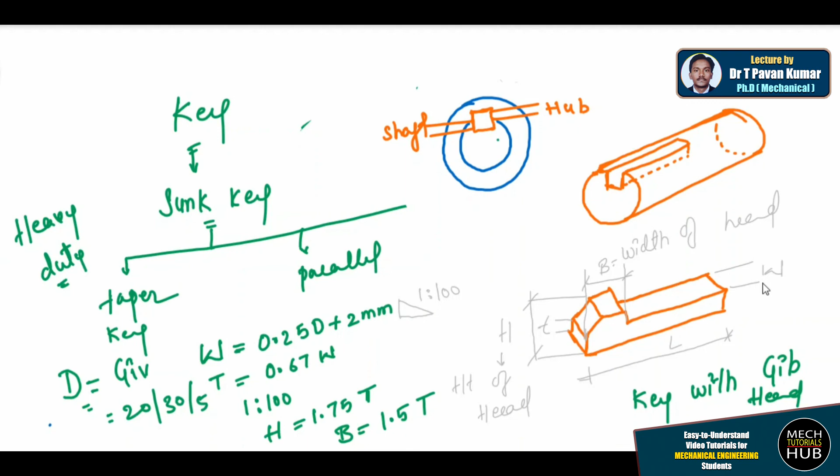Initially when I was discussing hollow and flat key, there is no groove found in the shaft. Now in case of this gib headed key or feather keys, you find a groove. Meaning, for example, if the width of this particular key is maybe 10mm, then 5mm is going to be in the hub and 5mm in the shaft.

Try to understand. This is how it is going to be represented. So the slot is drilled in the hub and a slot is drilled in the shaft portion also. So the key will insert in between those two. That is the reason this is used in heavy duty applications, where there is no chance of releasing the key while it is running with some RPM. This is how the arrangement is going to be.

These proportions you need to remember. You find a tabular column in the soft copy which I have already sent you. If you try to understand the tabular column properly, then everything becomes so simple. In that table you find different diameters, and for those diameters, what are the proportions of width and thickness, those are also given. Those are standard. For example, if the shaft diameter is 12mm, width should be 5, thickness should be 5. Those proportions are all given to you in the soft copy which I have sent you. Please go through it once.

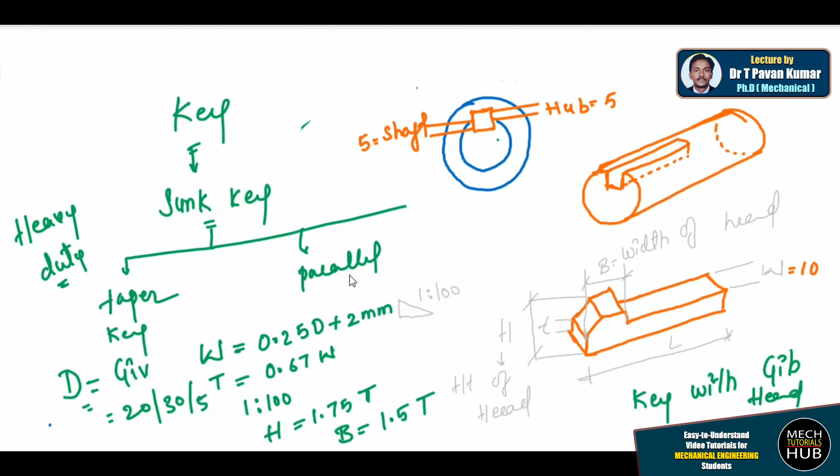Coming to the next one, which is parallel keys or feather keys. Now these parallel keys, wait a minute, I'll just change the slide to a new one. Now coming to parallel keys, or the other name is feather keys. Now this is again classified into types. Number one, there is only 10 minutes left, so I'll just finish off by giving you some briefing. Peg key, peg feather key, nothing but. Number two is single headed.

Number three is double headed. So we have peg feather key, single headed feather key, and double headed feather key. These are broadly classified into these three types. I'll try to draw those key diagrams and then close the session.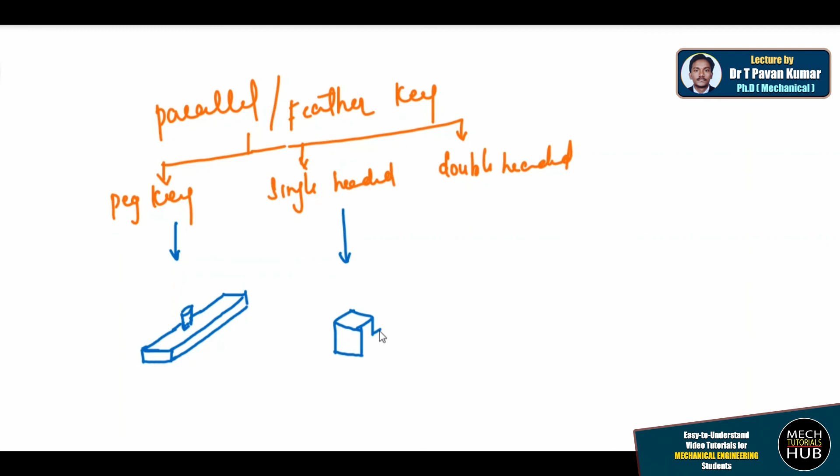This is about a peg feather key. Similarly, coming to the single headed feather key, the arrangement is going to be something like this. This is how the arrangement is for single headed. This is how the head is going to be. There is a circular hole drilled from here to the other side of the head, where you can fix a screw. Here we will try to fix a screw.

So in case of heavy duty, when it is running at 4000 or 5000 rotations per minute, there won't be any chances of releasing that particular key out of the system or out of the arrangement. Now out of these, this is going to be the width, here is your thickness, and the overall is the length. This is how it is going to be.

Coming to the double headed one, you have a filleted cross section, not flat. Here there is a straight line, this edge is straight till this point, after that it takes a curve down, then straight again, something like this, and you have a width for this, something like this.

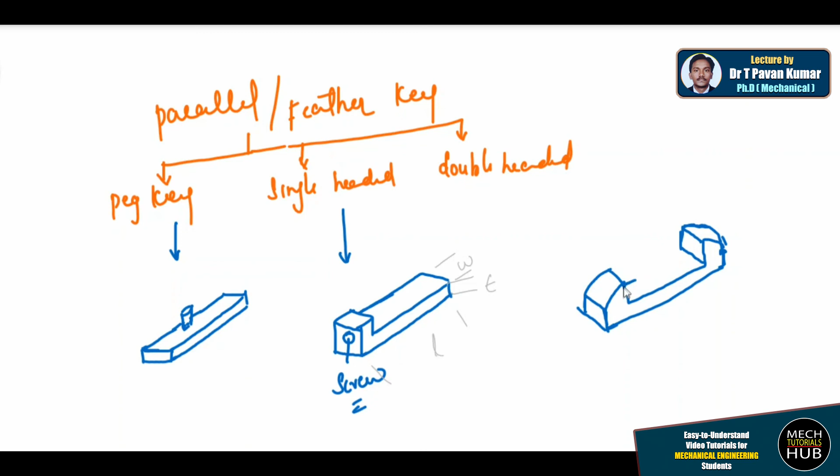This is how it is going to be. There will be a width, we call this as the width, this as the length, and these two lines indicate the thickness. Now this is how the double headed feather key is going to be.

Just go through all these topics once again, keeping in mind all the discussions, so that you understand the topic better. How the arrangement is going to be, how you need to do the representation. No need to draw all the 3D representations in your examinations. Only thing is you need to show the front view and side view, whenever a key is fixed between a shaft and the hub. No need to draw the 3D, because you are going to deal with simple things.

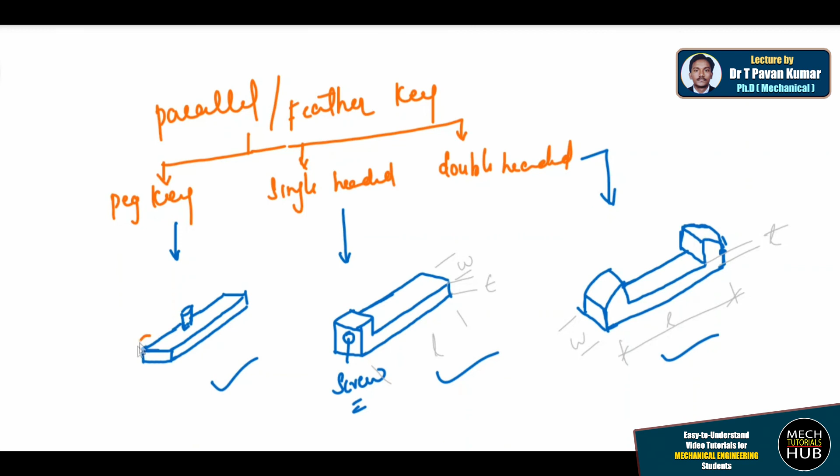Only front portion, whenever you try to represent, is visible. No need to draw the 3D. And side portion is invisible for all keys; it's going to be a rectangle again, but that is going to be invisible since it's inserted completely inside. So you need to show an invisible rectangle line, that's it for all the cases. A simple arrangement, please go through it.